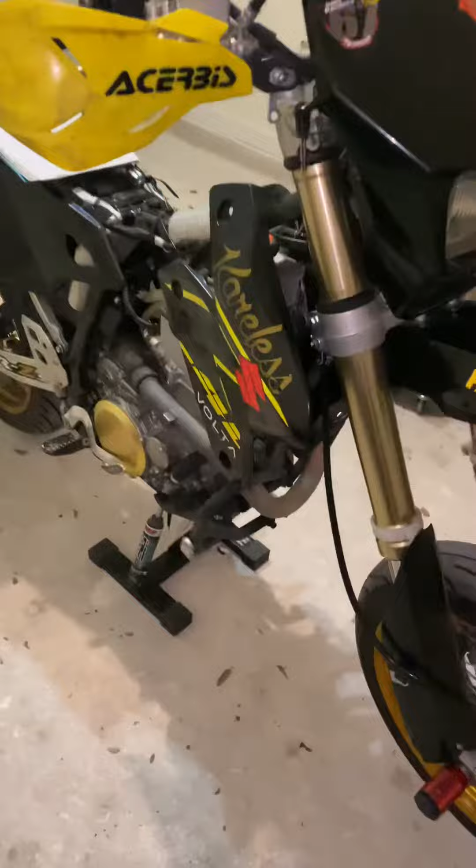So I've seen a lot of people asking about how to do a clean air mod on a DRZ 400. So I'm going to go over how I did mine real quick and just explain some of the problems that I had whenever I was trying to figure it all out, and what I did to fix it.

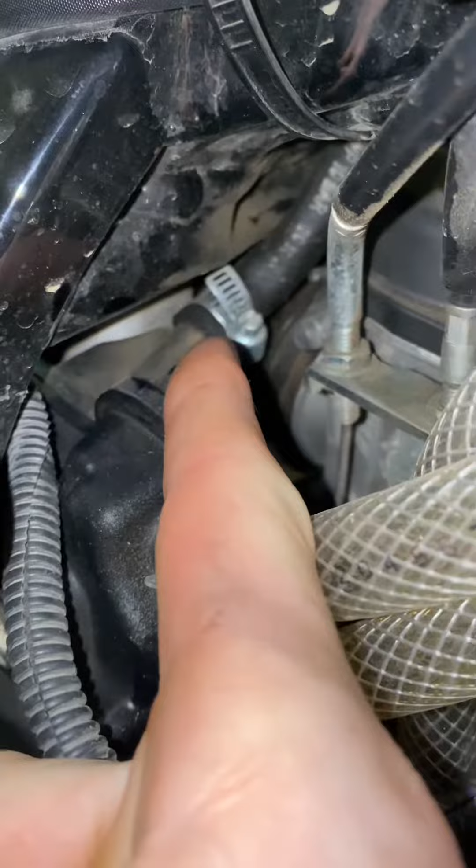So basically the first thing I did was I left all the stock lines on there except for the one on the back of the canister here. And so all of these were the factory lines. None of this was here yet. I just took that one line off, and it normally runs from the black box to your air box right here. And you can see I just capped off the air box where the hose used to run from there.

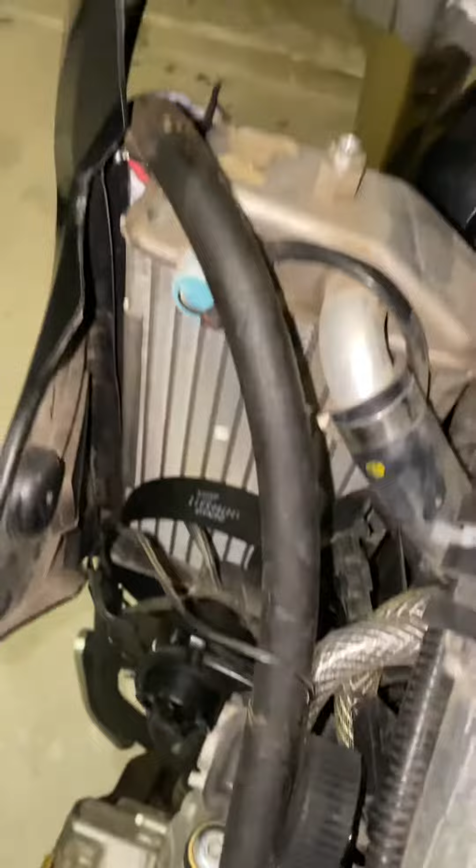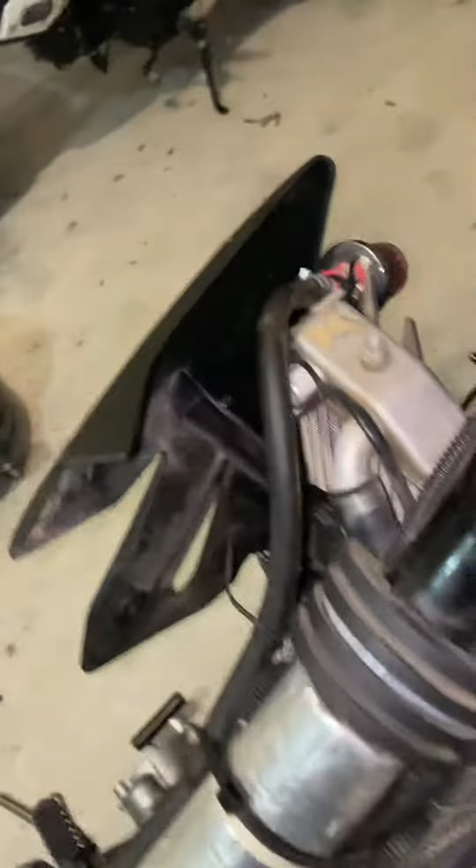So now on that, we follow it up to the radiator, and we have just a vent filter. So whenever I just did that, I was having problems with whenever I would do a wheelie, it would just spray oil out of this thing right here. So if you just do that line, it won't work. If you only replace just that one line right there, you're still gonna have the problem. What you really need to do is basically replace every line there, like you kind of see that I have.

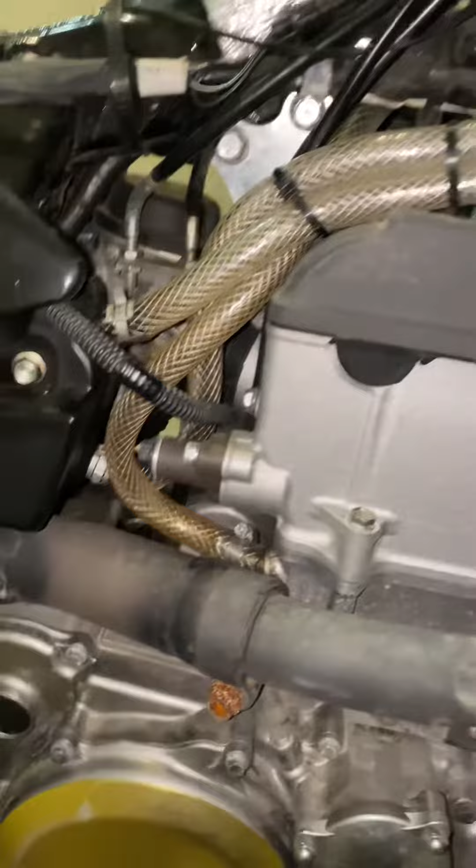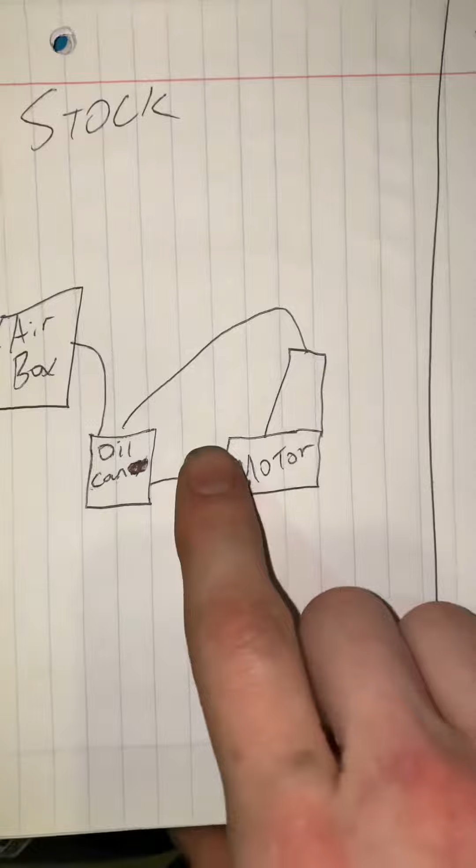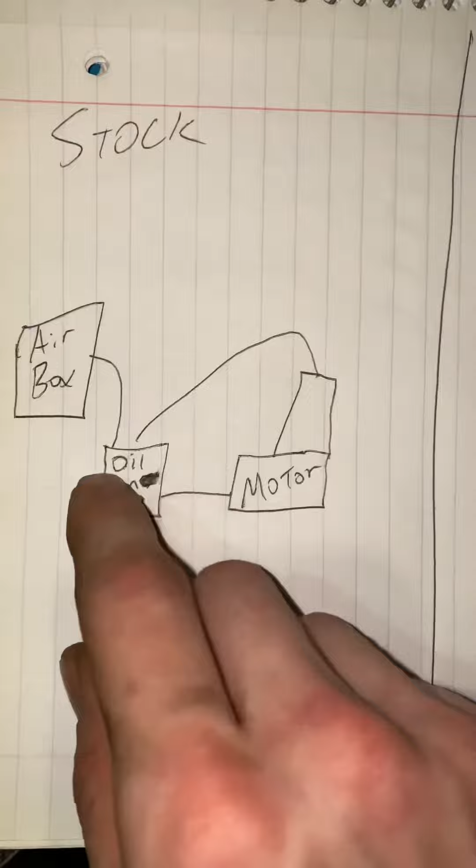So I drew a diagram to show you what the stock setup looks like. So here we have the motor, the line that runs from the motor to the oil canister, and then we have from the oil canister to the top of the motor, which is like the PCV, and then from here to the air box, which is the one that I was talking about deleting, putting the cap on here, and then running the filter.

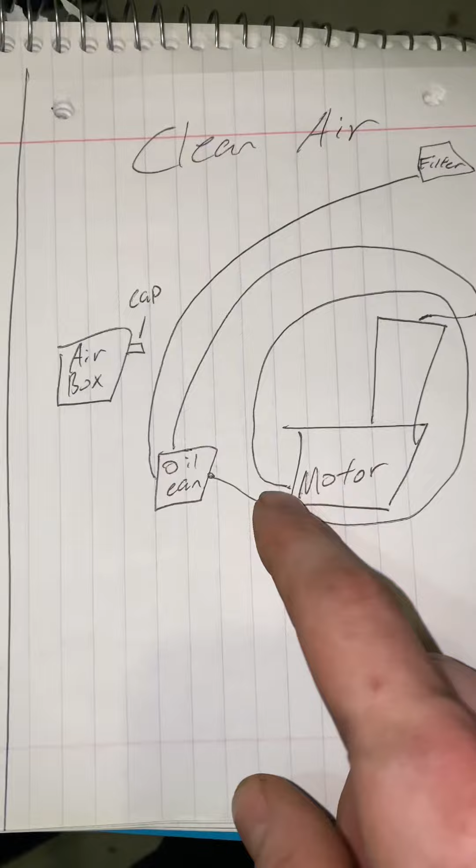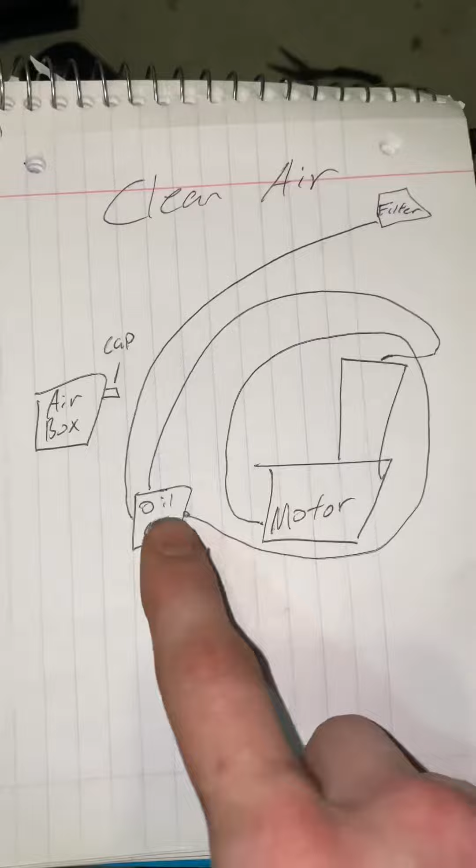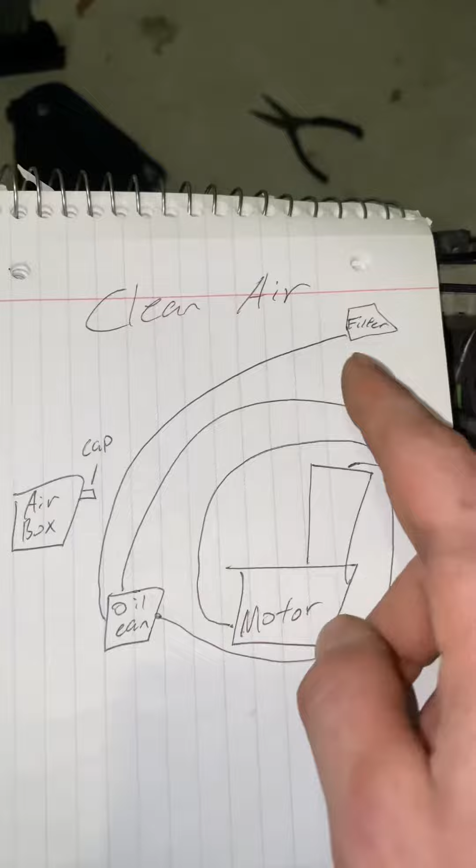So here we go, here's the setup that I have for my clean air mod. Basically the same thing, except this bottom line, it gets extended. So you take it and loop it up and around the motor and then back down to where it's supposed to go. Originally it would just go from here to here, but you need to make it go up and around and then back. And then for the one up top, you extend it as well. You take it and make it run around and then back. And then you do the filter like I was saying. So here's that as an example, just for the diagram. Cap the air box.

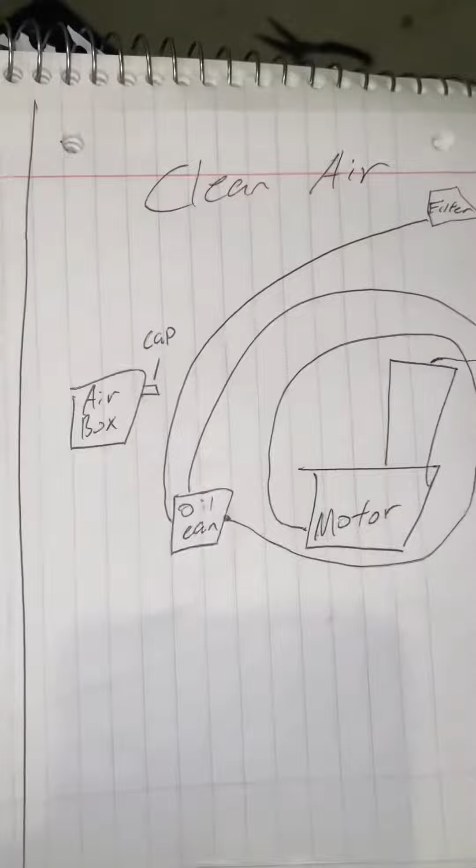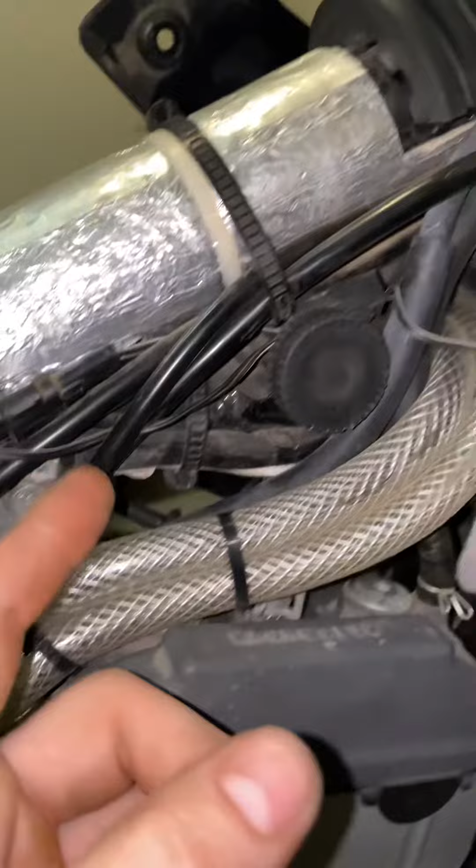So here you can see the hose coming off the bottom. It doesn't just go straight to there like it normally would. It goes up and around, and then I run it to the frame right here, back down, and then onto the box right there. And then for the one up top, run it up and around and then down there, and then boom.

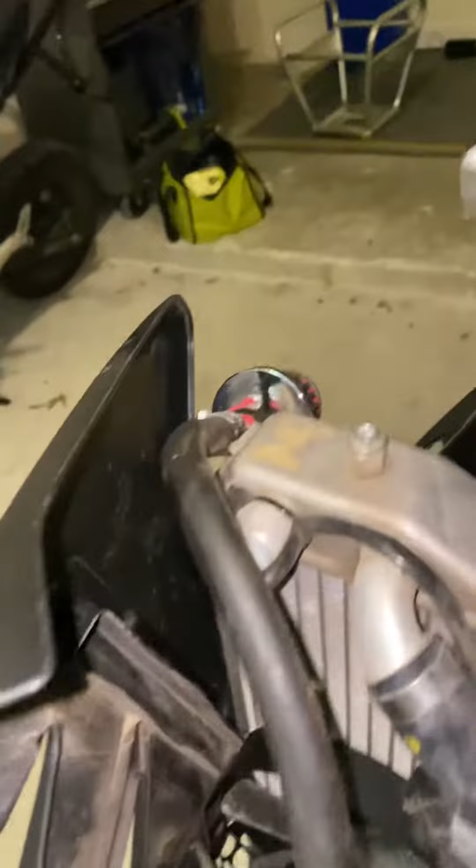Then you have the one that I was talking about with the filter, runs up. You can really put it almost anywhere. I just like mine there so it doesn't get all over the bike if it did spray. It doesn't spray anymore though, so. This should fix it. You can see where there's been oil running in here, and there's actually some oil trapped right there that's going to the box.

So basically what you're doing is you're creating a longer travel distance from here to here. Instead of it just going through a straight piece of tube, it has to go through this long section. So it has to travel up and then around and then run down to even get here. So by the time it does all that, you're not ever gonna get it through all of this to get to where it's gonna spew out on you. So this should fix your problem if you've been running into that.

Go ahead and try this. I haven't had any issues. Just always stay on top of your oil. Check your oil all the time. Make sure that you have enough. Yeah, just this should be it.